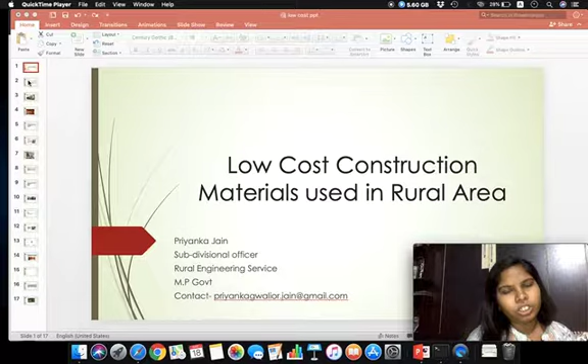Broadly, construction materials can be divided into three categories. Traditionally, mud, bamboo, bricks using local soil, stone, etc., come under this category. Next is conventional material like cement, steel, glass, etc., which we are using currently. And the third category is innovative materials: waste from agriculture activities mixed with traditional or conventional material comes under this category. Innovative mixed with traditional materials come under this category, as these materials reduce the material as well as structural cost from 10 to 40%.

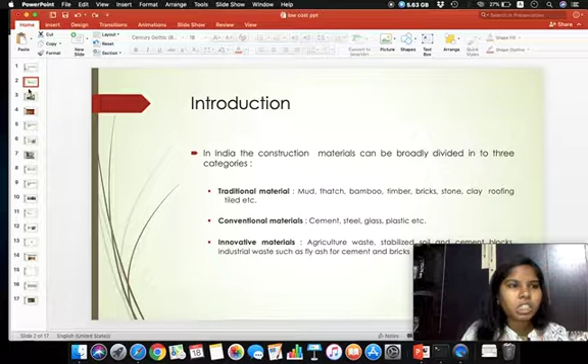There are a lot of such materials and technologies which are being researched but not in practice due to lack of proper knowledge by practitioners, and also the lack of skilled labor. But now the time has come where we should start practicing all such construction under various government schemes.

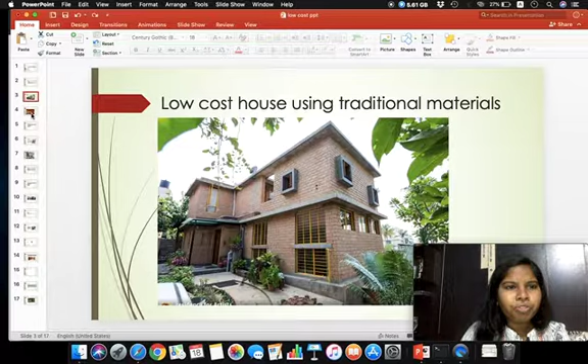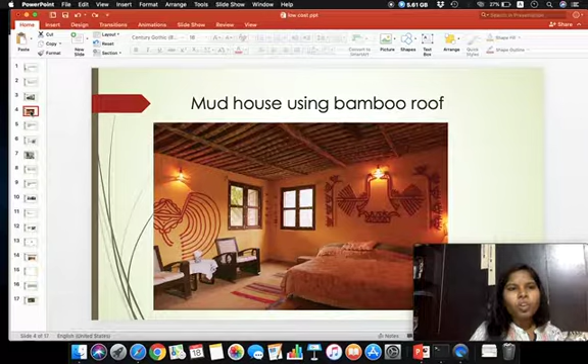Different modern and low cost materials widely used. To reduce construction cost, a material should be selected such that it is locally available, environmentally sustainable, non-toxic, recyclable, pollution preventing, energy efficient, durable, and with low maintenance. Some of the materials widely used in rural areas are hollow concrete blocks, different ash produced from agriculture waste and industries, prefabricated panels, etc. Let's discuss them in brief.

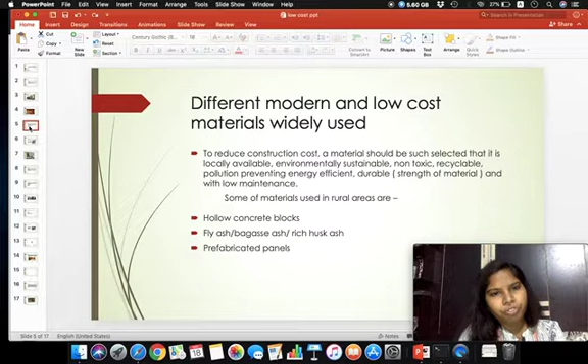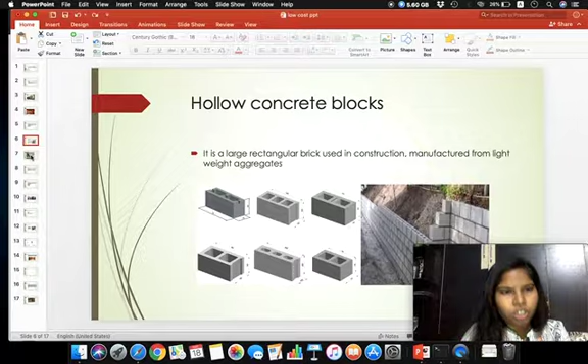First one is hollow concrete blocks. Hollow concrete block is a rectangular brick used in construction. It has many advantages over brick and stone masonry. They can be manufactured in different shapes and sizes. This picture shows the different shapes and sizes widely produced in rural areas. This image shows the wall construction using these hollow concrete blocks. This concrete wall can be constructed using reinforcement in earthquake prone areas to provide tensile strength.

Common size of these blocks is 39 cm into 19 cm into 30 or 20 or 10 cm as per the site conditions. They are generally prepared from lightweight aggregate available locally. Hollow concrete blocks contain void area greater than 25% of gross area. Hence, the cost and weight of material reduces. This picture shows construction of a circular wall using reinforcement. Let's understand the technique of constructing these hollow blocks in rural areas or at site with a simple video.

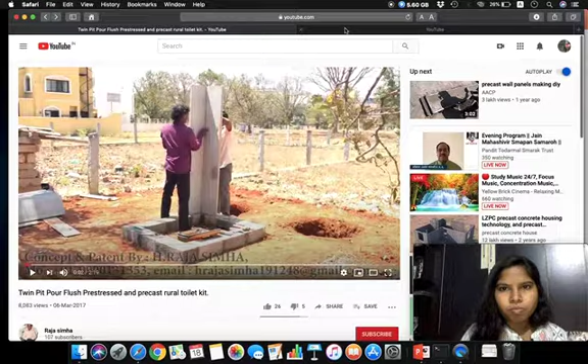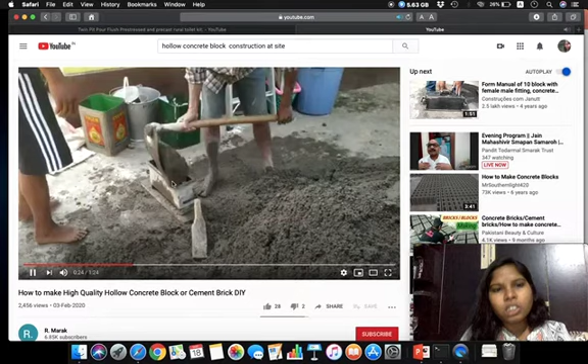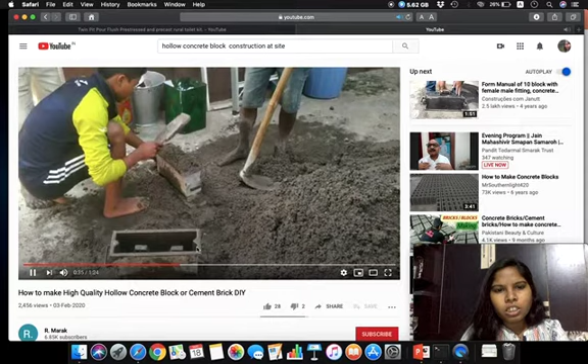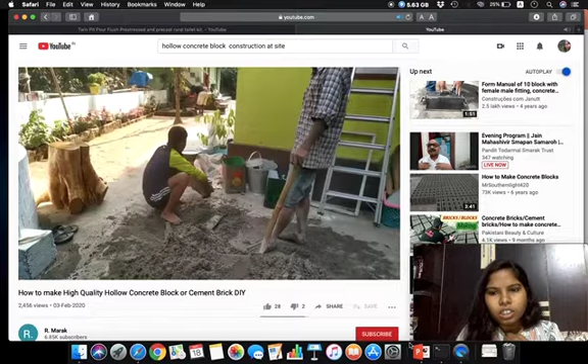This is the concrete mix. It is filled in mold. These are simple molds where a block is there to make the hole. Then concrete is placed in this mold and it is well compacted. This technique is so easy that these blocks can be prepared anywhere. See how these blocks are looking after curing. They can be used directly. These blocks save the plaster and the mortar used.

Next material is different ash produced from different kinds of waste like sugarcane bagasse ash, rice husk ash, or the industry waste fly ash. Fly ash is being widely used and is a common term nowadays. These ashes can be used in concrete as partial replacement of cement. Fly ash can be used in concrete, bricks, cement, ceramics, and in road construction. Concrete containing fly ash becomes stronger, more durable, and more resistant to attacks.

Fly ash in concrete can be used as partial replacement of cement. In fly ash bricks, fly ash mixed with soil is burned with agriculture waste, which reduces its cost. Fly ash sand lime bricks can be used as an alternative to clay bricks. Similarly, for low cost housing, as fly ash is used, bagasse ash or rice husk ash can be used. They show somewhat similar properties as fly ash.

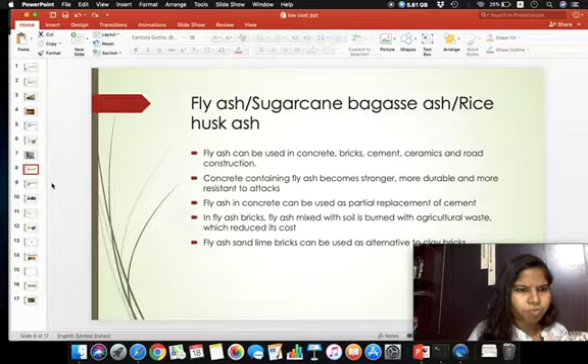Next is prefabricated panels. Prefab or prefabrication is the practice of bringing together components of a structure in a factory or other manufacturing site and then transporting the complete assemblies to the construction site where the structure is planned to be located. Different types of prefab systems are as follows: panelized wood framing, sandwich panels, steel frames, timber frames, concrete systems, modular system. Concrete system and panelized frames are being widely used to speed up the construction.

Last year, when India became open defecation free on 2nd October, lots of toilet units in rural areas were being constructed as there was a target to complete the construction of toilets on or before 2nd October 2019 all over India. Lakhs of units were being prepared in a single day. At that time, this technique was widely used. It has increased the speed of construction and also reduces the cost by 30%. Let us understand this prefabrication process with the help of a simple video which shows the fast construction of a toilet unit in a rural area.

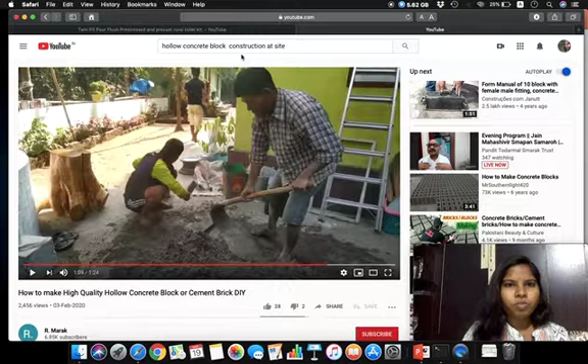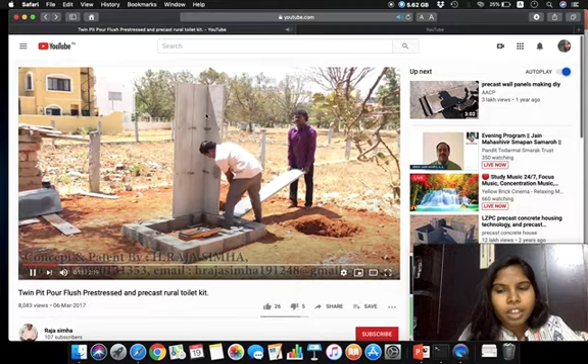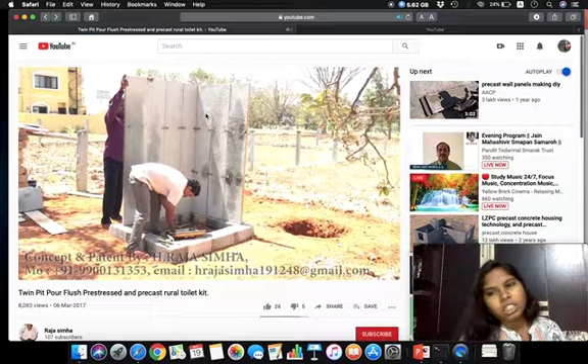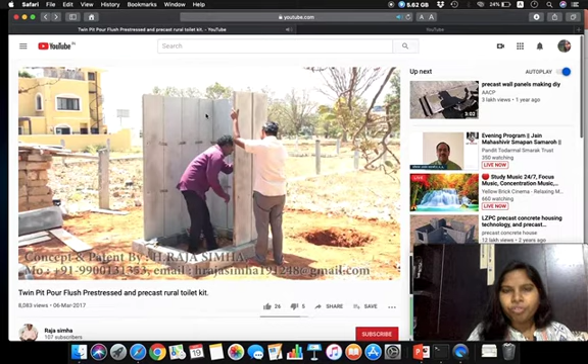These panels are factory manufactured and they are installed within hours on site. Similarly, large structures can also be prepared. Under the Swachh Bharat scheme, lakhs of toilet units are constructed using these techniques. Similarly, in different schemes where similar units are required in a limited time, this technique can be used. It is not only safe but also cost effective and timely constructed.

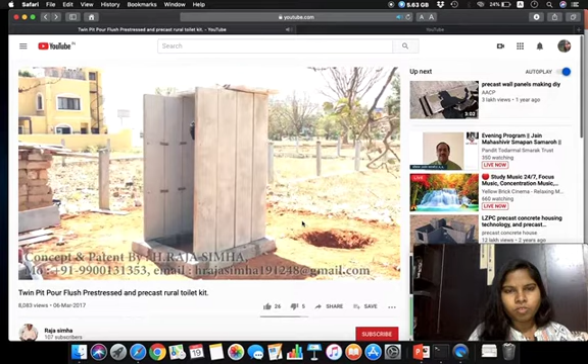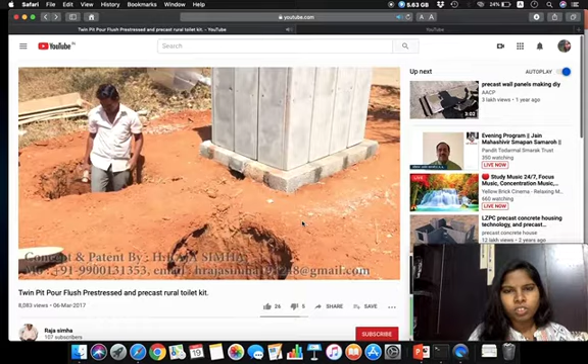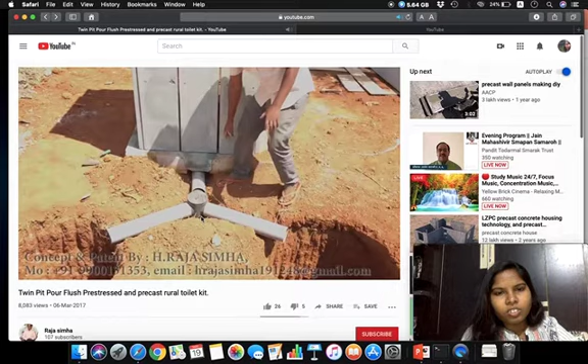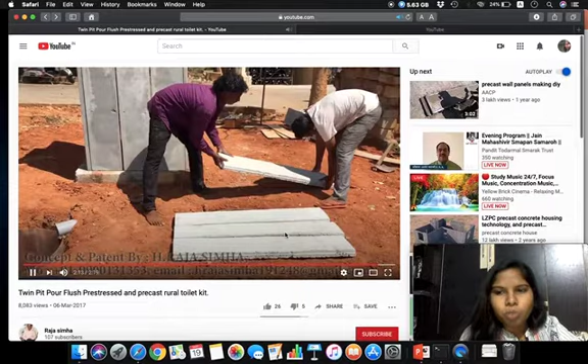See how easily a twin pit toilet can be constructed within hours. This technique is not only useful in small and rural construction works but also on large scale in large structures.

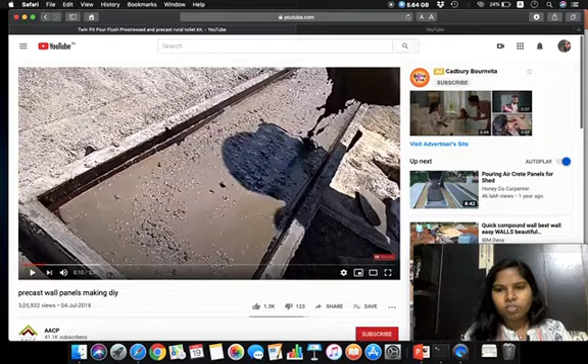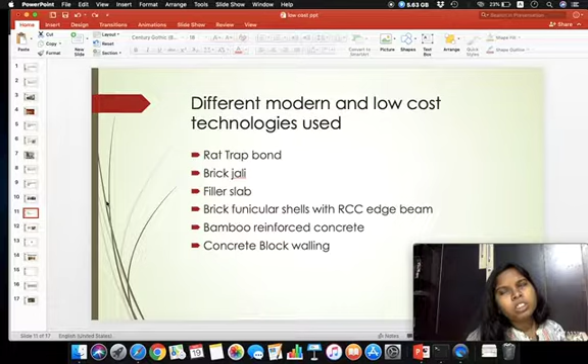Now come to different modern and low cost technologies used. Some of them are rat trap bond, brick jali, filler slab, brick funicular shells with RCC edge beam, bamboo reinforced concrete, concrete block walling. Few of them you have heard a lot of time as they are practiced from very old time. Like rat trap bond is a very traditional method of constructing walls in rural areas.

Rat trap bond is a modular type of masonry bond in which the bricks are placed in a vertical position, which creates a cavity in the wall while maintaining the same wall thickness as that of a conventional brick masonry wall. This cavity acts as a thermal insulator, making the interior cooler in summer and warmer in winters. It uses fewer bricks and mortar, reducing the cost of masonry up to 30%.

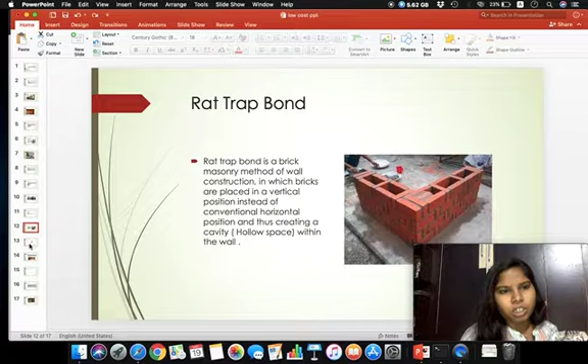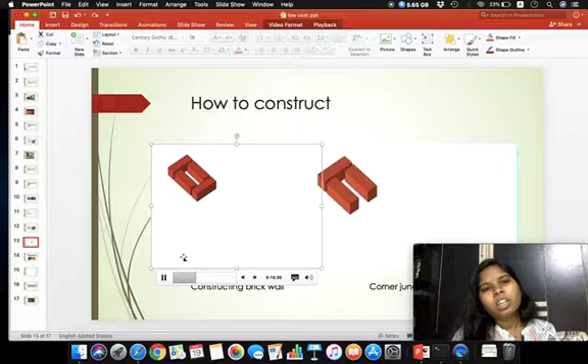Let us understand this construction technique with this simple GIF. In this technique, bricks are being laid in vertical position. Generally, a wall of 230 is being constructed where two vertical bricks with a gap in between are being placed and fixed with mortar, again with a second layer. They are constructed with a distance.

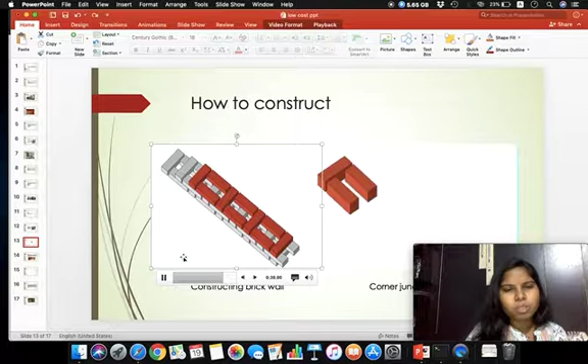At the corners, concrete or a complete section is placed to provide bond. Similarly, at corners they are provided with reinforcement so that their strength or joint is embedded. This image shows how they are being embedded at the corner junction.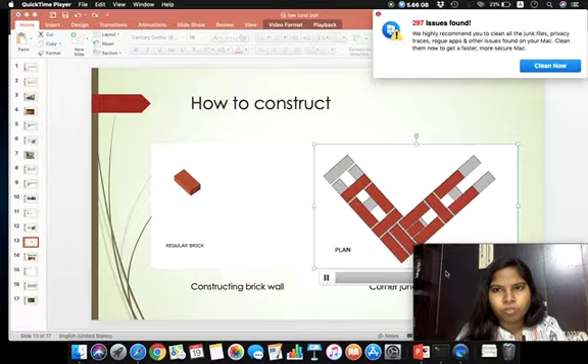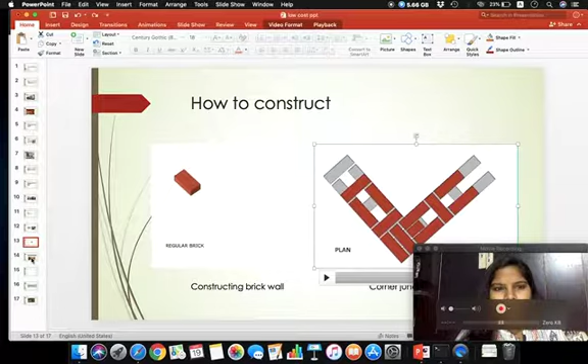Next is filler slab. Filler slab is an alternative slab construction technology where part of the concrete in the bottom of the slab is replaced by a filler material. The basic principle is that concrete in the bottom half of an RCC slab is structurally not required, as concrete acts as a compressive material, which is required in the top half portion of the slab.

As we all know the compression-tension diagram of concrete, the concrete below the neutral axis does not act and is not required, as below the neutral axis only tensile stress is generated, which is taken by the reinforcement. The concrete below the neutral axis does not play any role. In this technique, we can replace this concrete with different local, low cost materials like clay pots, Mangalore tiles. Sometimes jute is being used.

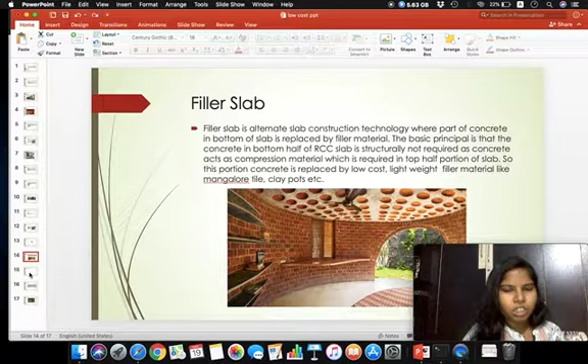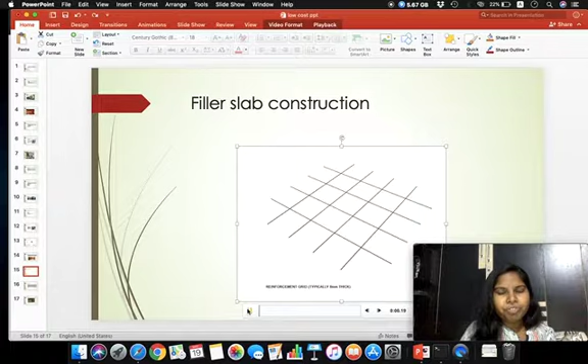This picture shows the image of a filler slab. It looks so beautiful from the bottom. Let us understand how this filler slab construction takes place. First of all, reinforcement is placed as in a conventional slab with a fixed gap, and then in the in-between gap clay pots or any other material are placed. Then the concreting is done.

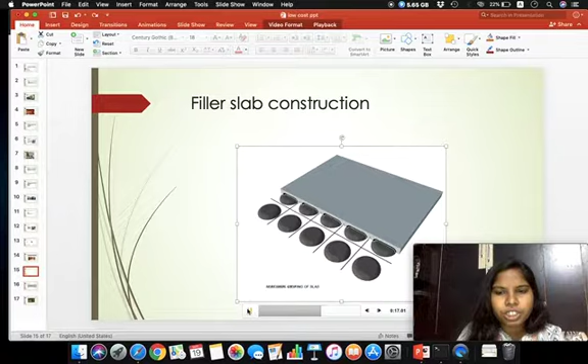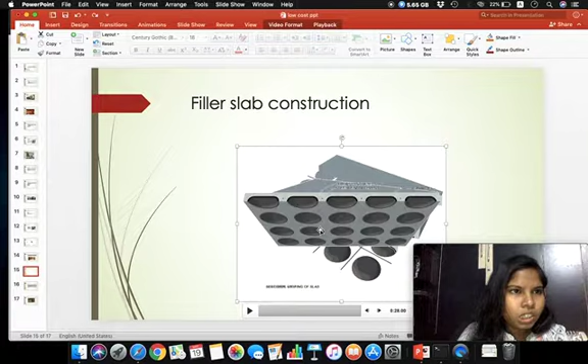After construction, it looks like this in buildings. It saves up to 25% of the total cost of the slab. The concept is that we can replace the concrete with lightweight filler material such as clay pots, etc. This technique is very innovative and is being used in rural areas. And it is aesthetically beautiful also.

There are few other techniques like funicular slab or modular concrete block or concrete block paneling, etc., which are being used. But for the time being, let's come to the conclusion. Under these growing innovative concepts, concrete blocks, cement wooden frames and tiles are locally made and most useful, thereby encouraging many small scale enterprises in this process.

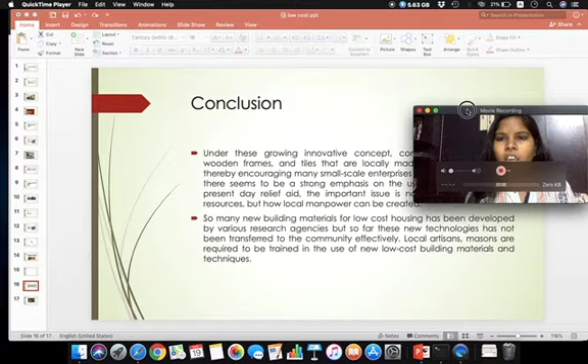Although there seems to be a strong emphasis on the use of local resources in present day relief aid, the important issue is not just the use of local resources but how local manpower can be created. So many new building materials for low cost housing have been developed by various research agencies, but so far these new technologies are not being transferred to the community effectively. Local artisans and masons are required to be trained in the use of new low cost building materials and techniques.

These techniques are so cost effective that they can reduce up to 40% of the cost of the total building. These practices are so useful in rural India, where an agricultural person or a laborer can construct their own house with less than half of the total cost of the building. So for the development of our country, a person should have a house and food. In upcoming time, there's a problem of food and housing in rural India. Such techniques we can use to provide them proper houses.

Under the rural housing schemes, some of the technologies are being used. There are many other technologies which are being researched, and hopefully they will be used soon.